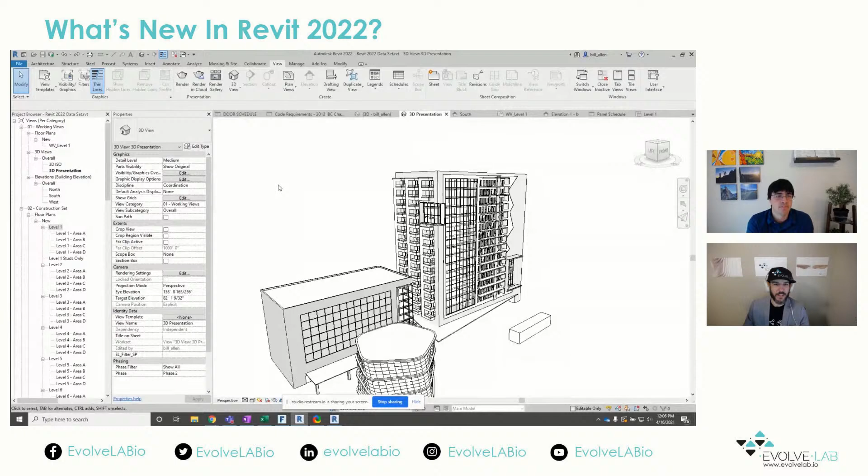I'm gonna start off with some of my favorites, and I'm curious if they're your favorites, Daniel. It's okay if not, but...

One of the cool new features they added in Revit 2022 is the ability to just show the stud layer. This has been a long-standing thing - the typical way architects document projects is to document and dimension to stud. That's really important, because when someone's installing framing on site, they're not measuring to the drywall, they're measuring and installing per where the stud's at. So a lot of architects dimension to face of stud, and you could dimension that, but you couldn't graphically show just the stud layer.

So now they've introduced this 'core layers only' option underneath the visibility graphics. If I hit that, it only shows the stud layers. And then of course you can go through and start to dimension to just the studs.

So I'm curious, from a 1 to 10, what does that do for you as a licensed architect? Oh man, a number rating, I don't know. I thought this one was pretty cool - maybe I'll put it at like a 7 or 8.

I worked on a lot of interior spaces, like a lot of office spaces, which have tons of partition plans. When you're getting shop drawings to the framing contractor, the framers, it was a little tedious to find the right line to dimension to. Caused a lot of mistakes because, like you said, you couldn't hide it. We actually made fake 2D drawings where we line-worked everything, or the other workaround was using the line work tool, which is very unreliable. Yeah, and it's very hard to know what people have done or to undo, to know what lines are overridden, etc.

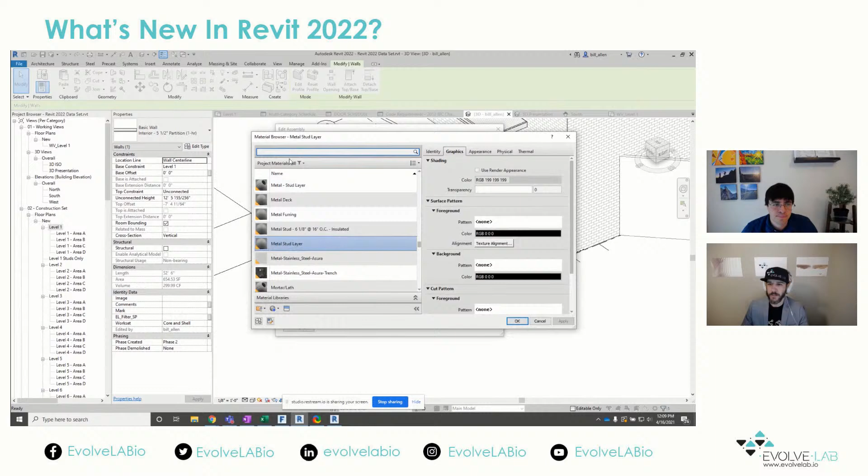First off, you have to go into the wall structure and change this layer to variable. So whatever layer you want to taper, that's the one you have to set. You have to first do that as variable. Let's use something more realistic, maybe like CMU or something like that.

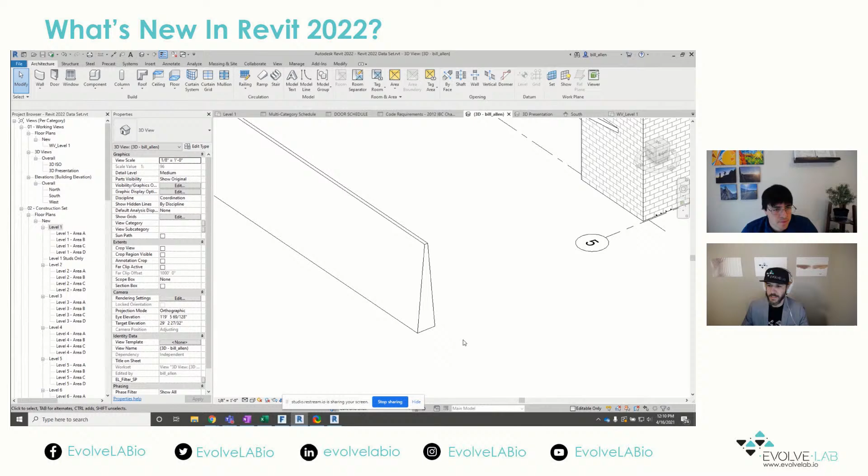So if we have this kind of layer in it and it's tapered, what you can do now in the properties is change the cross section from vertical to tapered, then override the type properties, and change the angle. So if I change this to say 5 degrees or whatever, you get this tapered effect with walls, which is pretty cool.

In the past, you've had to use the Revit conceptual massing environment, load it in, wall by face it - it's always been a challenge. Things would get disconnected. It also honors penetrations like doors or windows, which is pretty cool too.

They also have the ability where you can put in the angle in the properties, or you can actually drag these to a certain location if you want. So what are your thoughts on the tapered wall command?

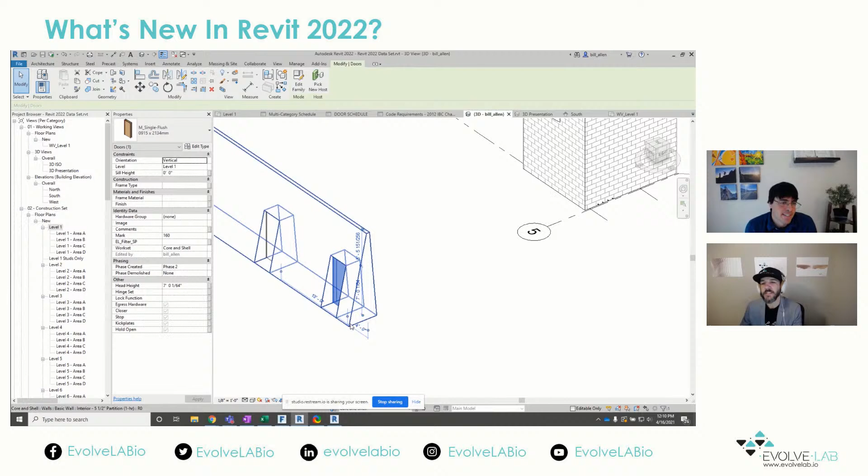It's kind of neat, yeah. I think it's not as impressive as the slope walls last year, which was really cool. And I think they've also added the sloped wall edit profile ability, is this true? Yeah, that's exactly it, because in most Revit projects, by the time you're done, almost all walls end up getting some sort of custom profile.

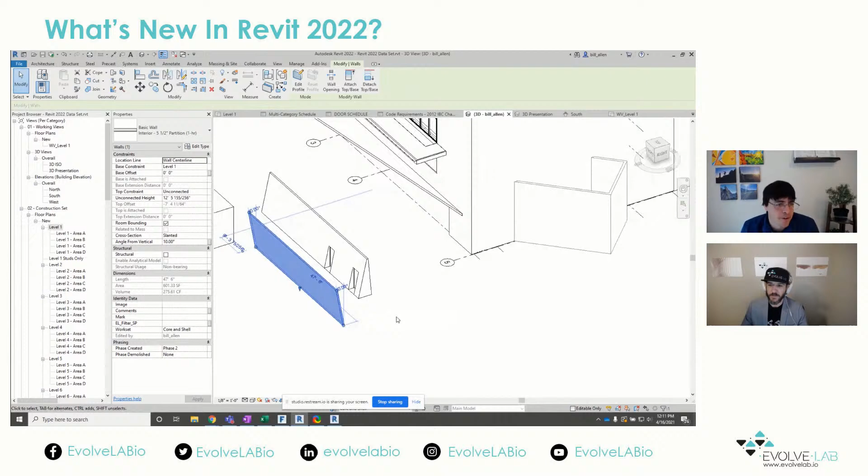Definitely. In general, I like that they seem to be trying to take the more common wall necessities and make them available using the native wall families instead of wall by mass. Wall by masses are really handy sometimes - you can do some complex forms, but it also kind of shuts you out of using a lot of other Revit functionality on those walls because they're a bit like a different entity.

Definitely, yeah, agreed. I can't say I can think of too many times I would have used tapered walls, but retaining walls, I'm sure it's out there. Definitely, yeah, the conceptual wall.

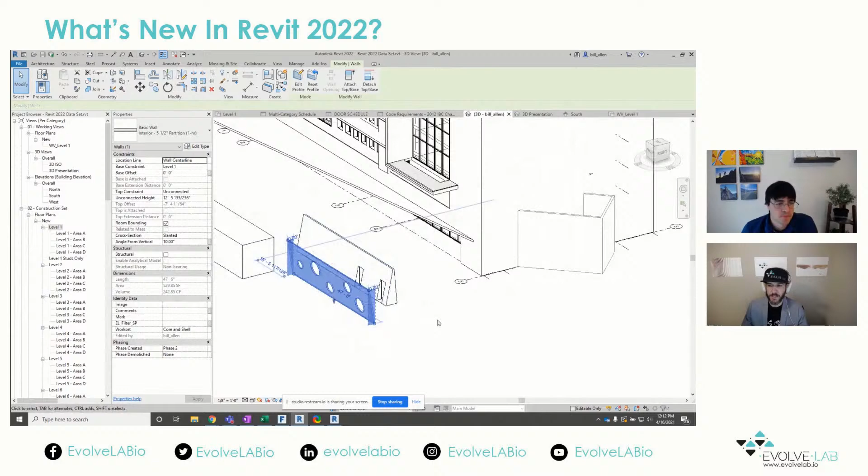Yeah, in the conceptual massing environment, I always called that Autodesk's best kept secret, because with the exception of Zach Kron and his blog post, I didn't see a lot of people knowing about that environment. But that was the way you had to do these kinds of geometries, and I think this is much better - having it as a system family, being able to edit it natively in the project, is much better.

Yeah, this is cool. The mass environment is really cool, but the modeling tools, kind of like the Revit family, are not so - maybe intuitive isn't the right word - but they're dissimilar from many other 3D modeling softwares, like the way you create a surface or a volume or a solid, how it kind of works. So you need a whole separate knowledge set to try to get what you want.

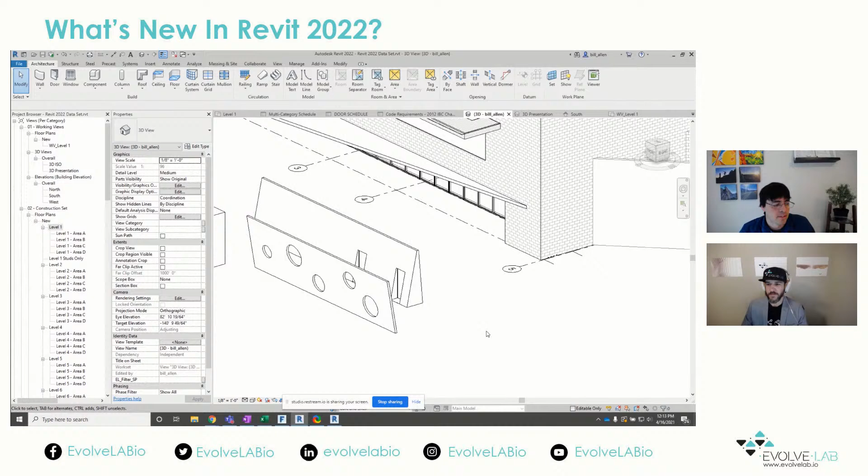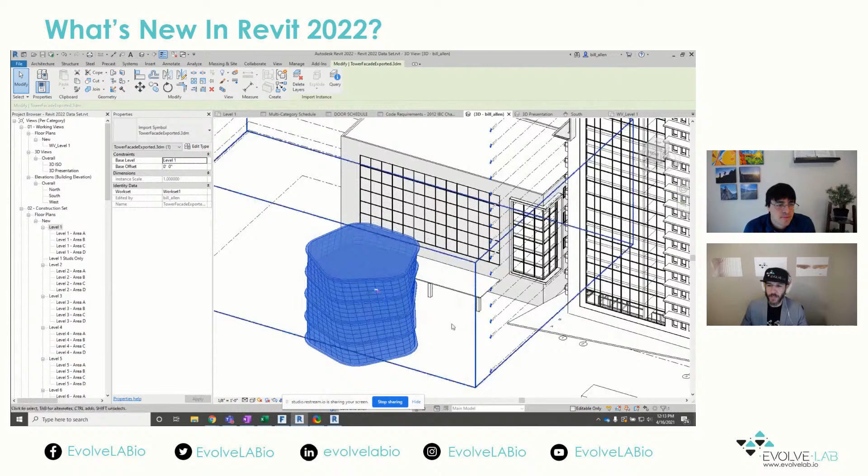What's really nice is I have this Rhino model that Chris shared with me - Chris on our team, one of our Grasshopper gurus, shout out to Chris. So any updates that we make on this, and you link it into your model, you can go through your typical manage links, click on your Rhino model, and then do a reload, which we didn't have before - you just had the import function. So that's really nice as well.

So I noticed they're doing a little bit more towards tipping the hat towards interoperability. It's not true interoperability yet, it's just the linking. But the FormIt integration actually was the one that I was pretty surprised about.

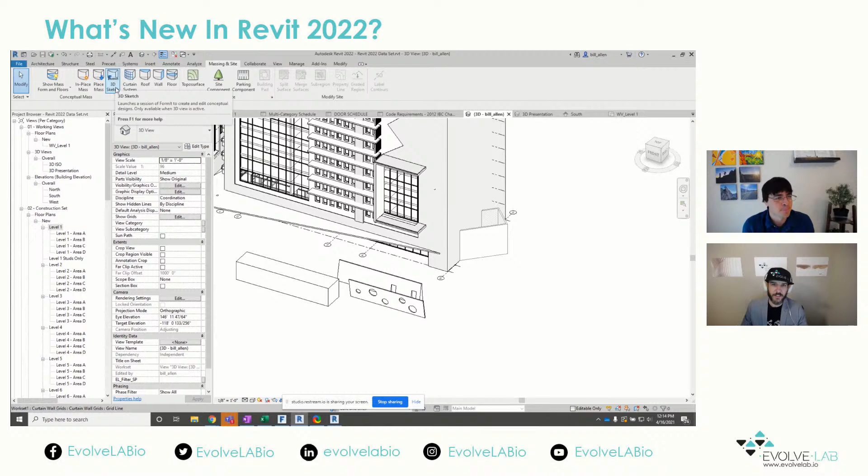What they did is they added this button in here, and it's this FormIt 3D sketch. You're pretty intimately familiar with FormIt, right? You helped out with some efforts on that, I heard. Yeah, disclaimer: we were working with the Autodesk FormIt team on some of their primers and tutorials and things, so I really got to explore FormIt and a lot of the cool tools that are in there.

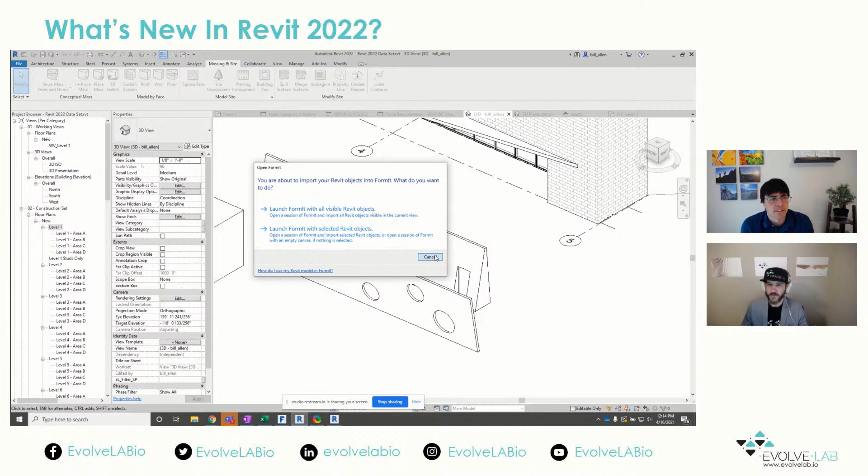A lot of people don't know about it because they've used SketchUp or Rhino or something else, but it's worth checking out. I can't remember exactly how the licensing works, but it might come with whatever Autodesk design package. Yeah, the industry collection, it comes as part of it.

So if I go through here, this one I was really surprised - I was like, okay, it's supposed to have some kind of FormIt, Revit integration. How does this work?

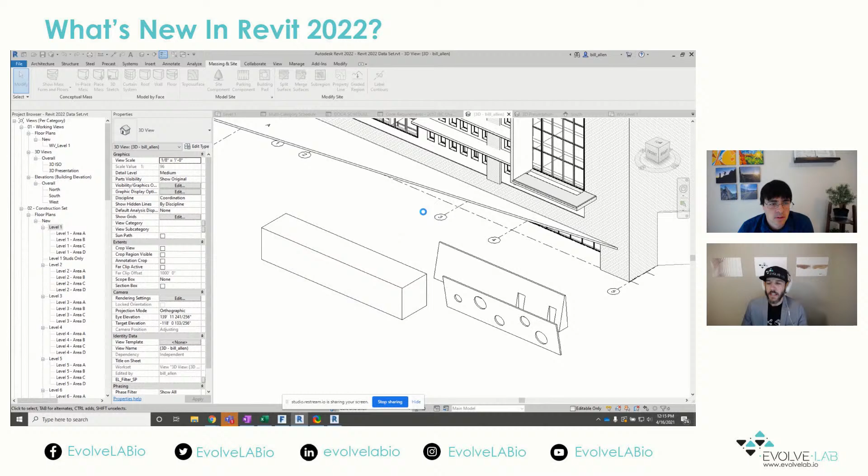If you go to the Massing and Site tab, there's a button called FormIt 3D Sketch. If you click on this, it'll launch FormIt. It takes a few seconds, especially if you have more geometry like I do here. What I was really surprised about is that it will contextualize your Revit model.

So it'll open up FormIt, but then contextually you'll have all of your other geometry. Of course, it's loading here. I have a version already open, so maybe I'll just jump to that. But in here, you can see it'll actually bring in all of the geometry within your Revit model.

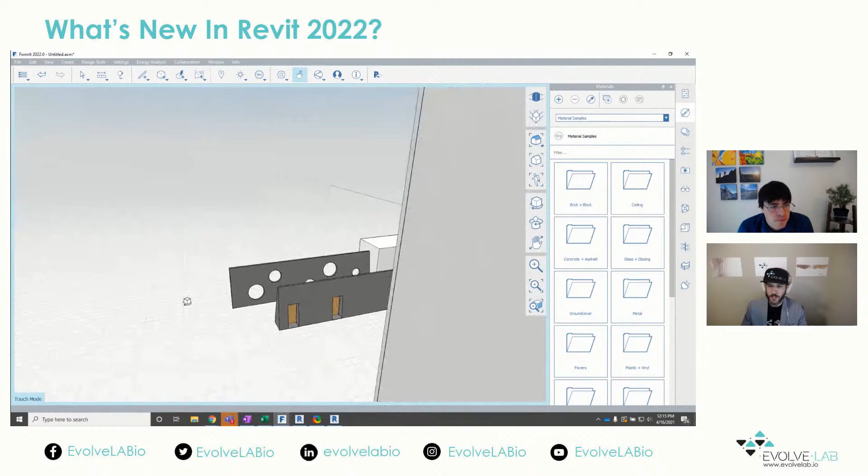There we go. So you can see even this tapered wall and this sloped wall that we just did with the profiles is showing up in real time in the FormIt sketch, which is really helpful if you're doing urban infilling and need contextual geometry to work with.

And you can go ahead and rough off that geometry too, use copy, and I think somehow the layers control what is Revit and what gets imported back into Revit, what FormIt things come back. But maybe they come in as meshes, I can't quite remember.

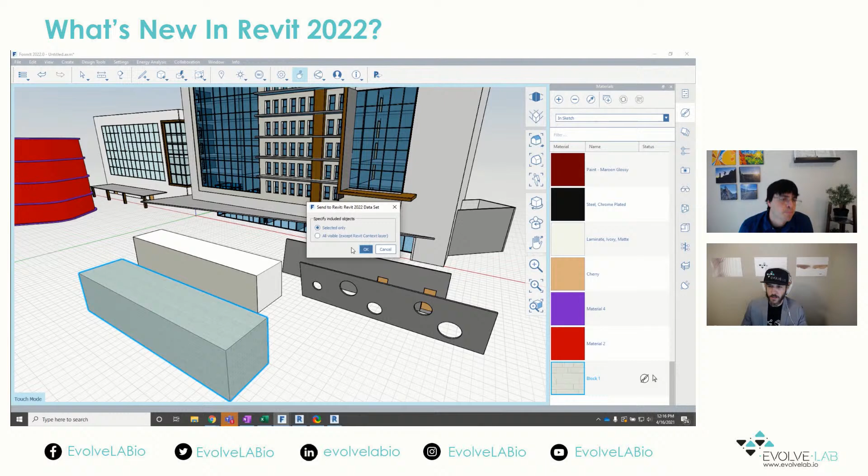So what they did is they introduced this 'send the selected model back to Revit' feature. I just have a box here, but before I do that, I wanted to show that if you go through it, you can paint different faces over here. If I click this color and put that on there, and then launch back to Revit, I specify included objects, all visible except the Revit context layer.

I think this is the one I want. And if I push this back, it'll actually push that geometry back over to Revit. So this new geometry is here. And if you change this to realistic mode, the materials actually go along for the ride as well. So you can see I painted that, and now it's over here in the Revit file. I was pleasantly surprised with that, I thought that was pretty cool.

That kind of integration, the contextual piece - what I understand is they're trying to let the user work in its respective platform. They're not trying to make Revit into FormIt, and they're not trying to make FormIt into Revit, but trying to let you use each tool, but better integrate them, as I understand it.

Yeah, I think that's the goal. I think it's pretty cool. You can use FormIt's more fluid, maybe more intuitive modeling tools, and they have some material editing tools and customization in there, and then it all will just come right back into Revit.

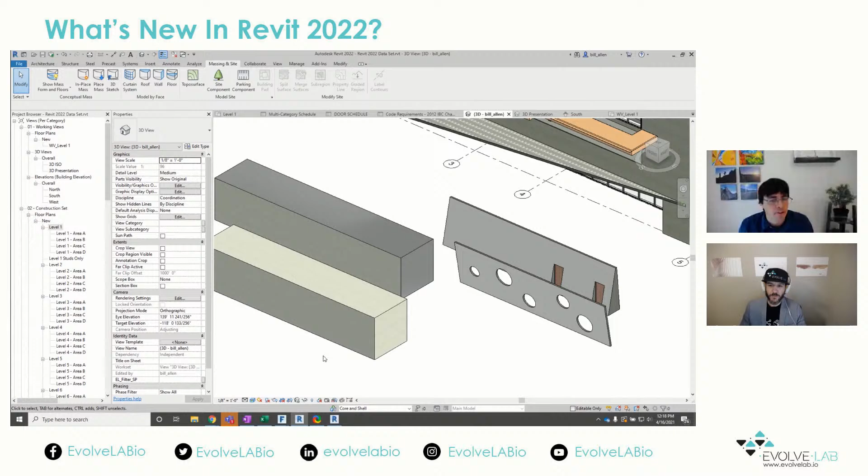What the Autodesk staff showed me is to use your section box in 3D and pick a section of your model where you want to do some design studies, then you can go into FormIt and just on different layers make different freeform shapes, whatever you want, pretty quickly, probably a lot quicker than you can do it in Revit. Then just import them back and maybe put them on design options or something.

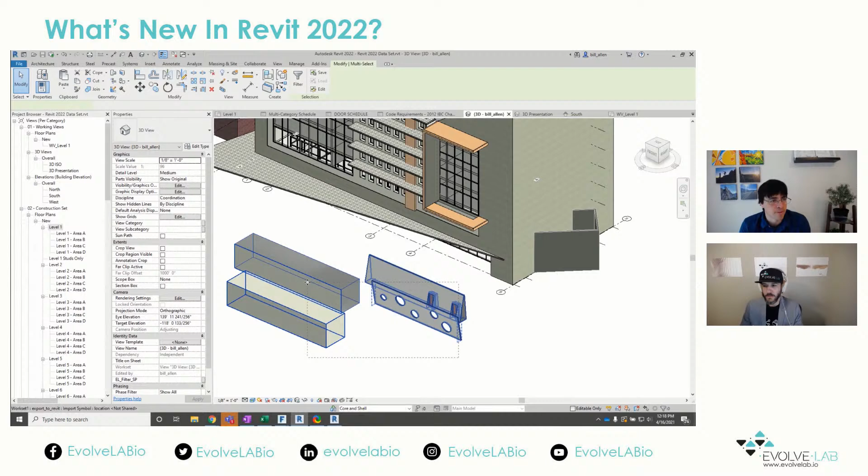That sounds like a really cool workflow. Maybe in a future live session, maybe you could show us how to do that. I think that sounds like a really cool workflow. But there's a lot of options there with FormIt, and you have the Rhino integration too.

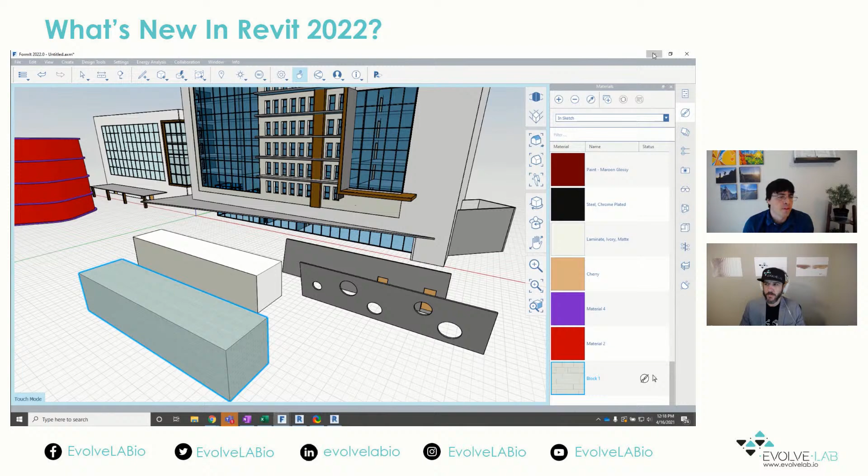Definitely. And I think the materials are separated too, and somehow you can control the visibility of the FormIt imported things, but also in the material library, it groups all the FormIt materials together too. Within the Revit environment or within FormIt? Within both, within Revit, yeah. Oh okay, cool, yeah, I haven't seen that yet.

You have to show us, maybe if we're going to do FormIt 2022, that one has lots of new features too. I like it. Get it on the calendar. I like it, all right, moving on.

Just because we have limited time here, I want to keep trying to get through these features. The other one I was pleasantly surprised by - I forgot to ask you, on a scale of 1 to 10, the FormIt Revit integration, what's your thoughts on that?

I'd probably call that a 6 or 7. One downside, it's great for the form modeling and stuff, but I think the one downside is the family. Everything in FormIt comes in as if you select one of those, a specific type family, or an imported AXM object.

Anyway, I think it'd be cool if it could develop even further, so you could have wall layers or window objects or stuff in FormIt that kind of come in and adapt to their respective properties. Maybe that's the next level. But I like that, it's a good suggestion. Maybe bring it back to the Autodesk team on that.

Sweet, yeah, all right, cool. Hard, but cool. Yeah, all right.

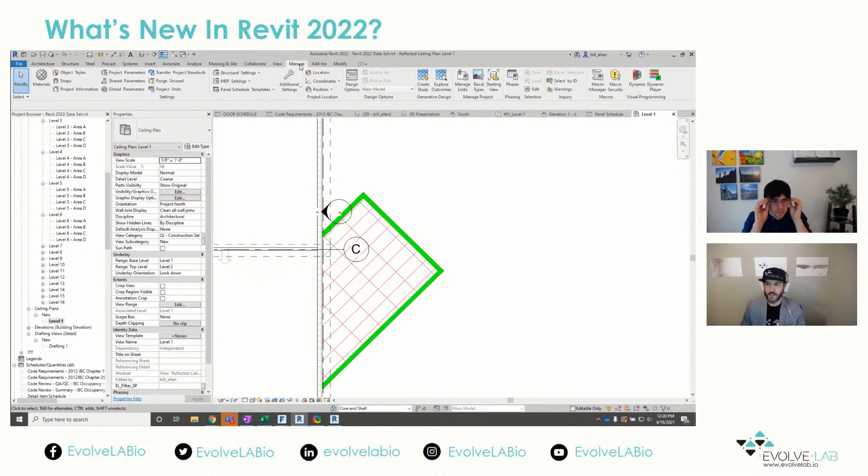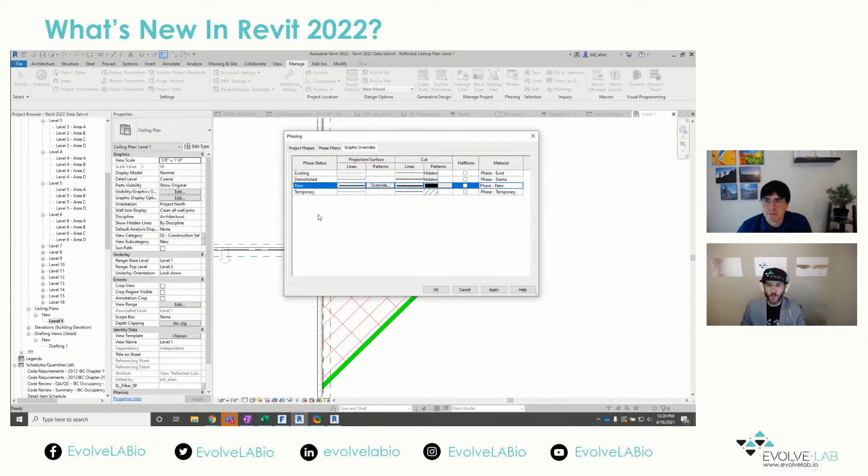So this other one that they introduced, phase filters. Now you've always had phase filters. When you go to your phases, you get project phases, phase filters, graphic overrides, etc. But you've always been limited on the graphic output of said phases, and specifically what elements get associated to that phase filter. As an example, I can't parse out walls exclusively, I can't parse out ceilings exclusively within this kind of phasing box here. But what they did is they introduced the ability to bring the phasing environment into Revit filters.

So I just set up a few of these to test it out. I created one for walls, and I created another one for ceilings. What's cool about this is that you can now not only modify based on the phase it's associated to, but the category of the objects within that phase. So I can start to go through and very surgically say, hey, I just want the walls, or I just want the ceilings. And further, I can also say which phase it's associated to. So it gives us a more surgical approach for applying phases within the phase filters.

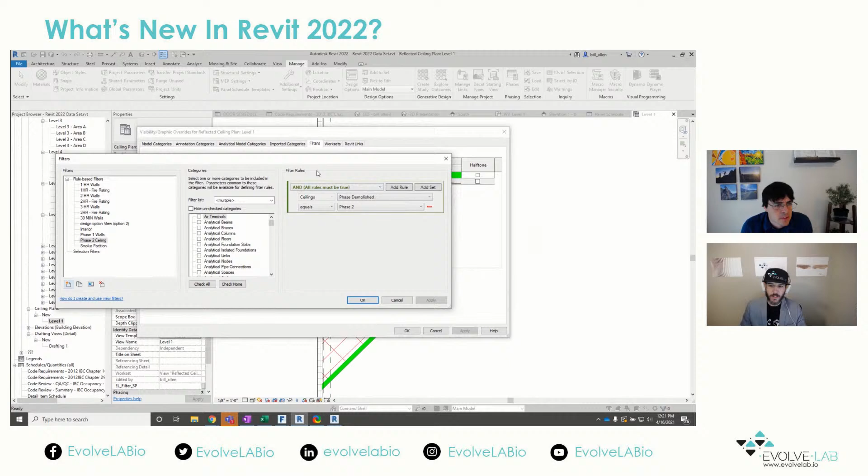I'm not sure, this seems pretty robust here. I'm curious to see what happens to that kind of phase dialog box. But this allows you to really meticulously edit those specifically based on phase and by category. That one I thought was pretty darn cool. I didn't know if you had thoughts or comments on that one.

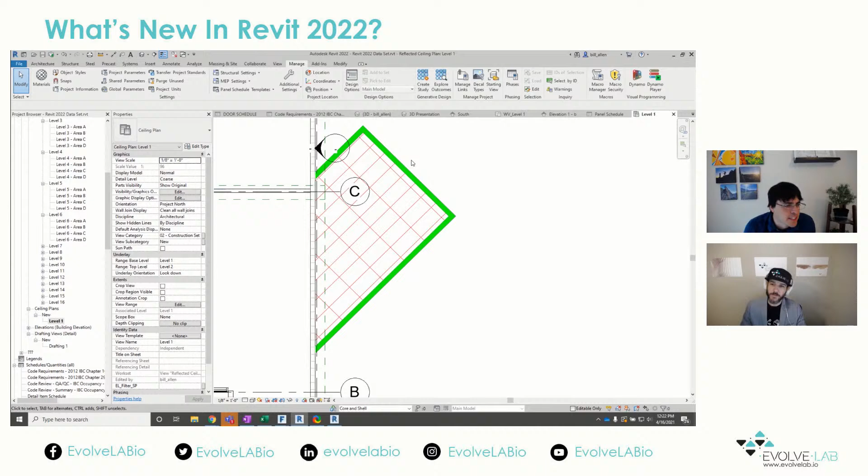Yeah, that's cool. So can you see objects from different phases filtered in the same view? Yeah, I think so, if I understand your question right. We have different objects assigned to different phases, like this one here is phase 1 for the walls, and phase 2 for the ceilings. And then you can associate the colors to them. If they exist at this, yeah, this is pretty neat, much more finite control over the phasing. Yeah, definitely, it's pretty cool. So that one's pretty neat.

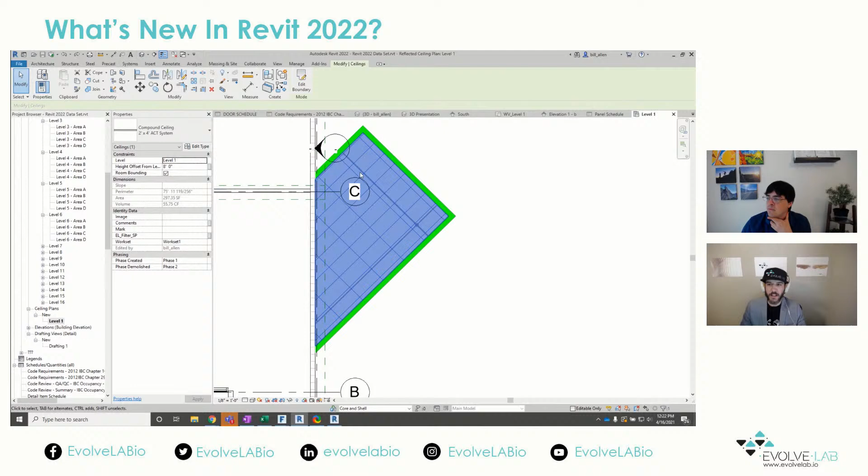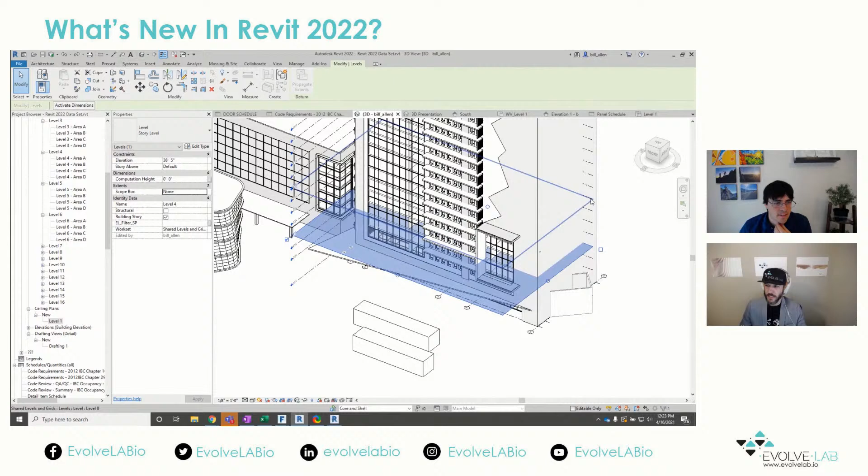All right, that is the phase filters. The other thing that they started to introduce, going back to our 3D view here, is the ability to add grids to 3D views. I think Navisworks has had this for quite some time. They introduced levels in 3D view, I think version 2020, 2019, somewhere around there. And so now they've introduced being able to have grids in 3D view.

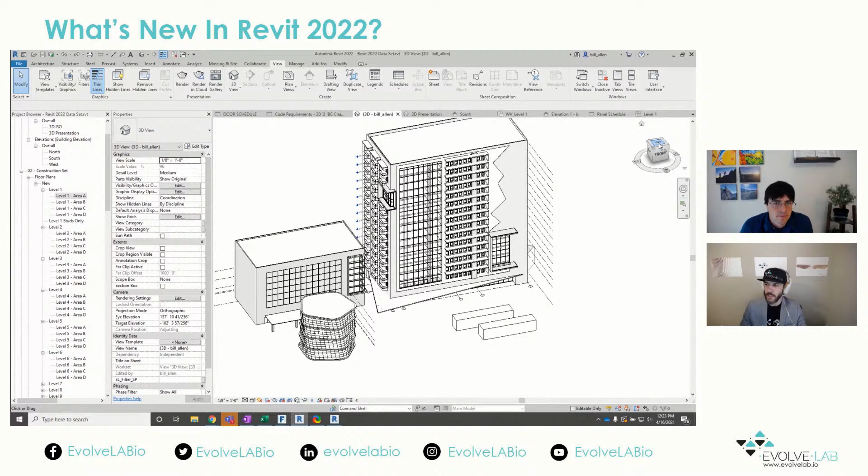And for me, I do a fair amount of modeling in 3D. I actually don't do a whole lot in floor plans. Even if I'm doing a floor plan, I'll typically do a top-down view, and I'm always trying to, because I just feel like I can get around the model quicker. And so being able to have those grids available in a 3D view, I found super helpful.

I'm going to rate this one probably like a 2 or 3 for me. It's helpful, not mind blowing, but helpful.

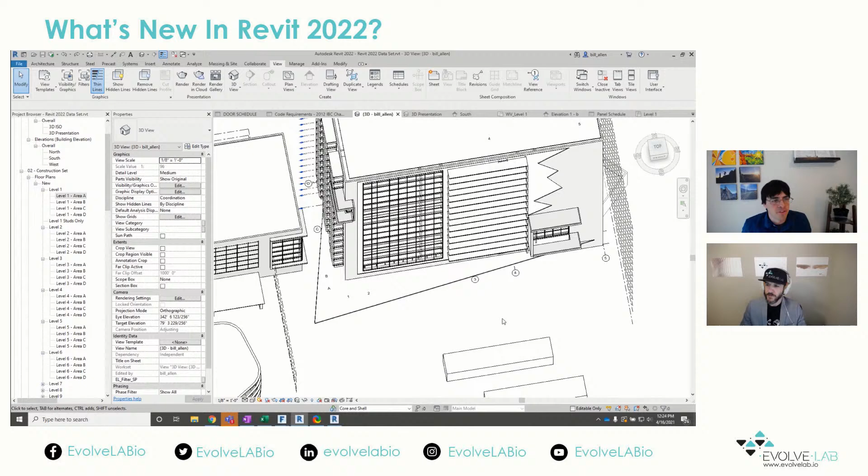I feel that, it's kind of the natural successor to the level thing. I find it handy, especially during project setup or maintenance, being able to manipulate the overall grids in 3D. Sometimes if you're trying to keep all your grids organized, you have to set up a view and make sure none of the grids have been switched to just the 2D extent in that view. It's hard to see if you have multiple buildings, then you get grids from one building overlapping another, just to manage them.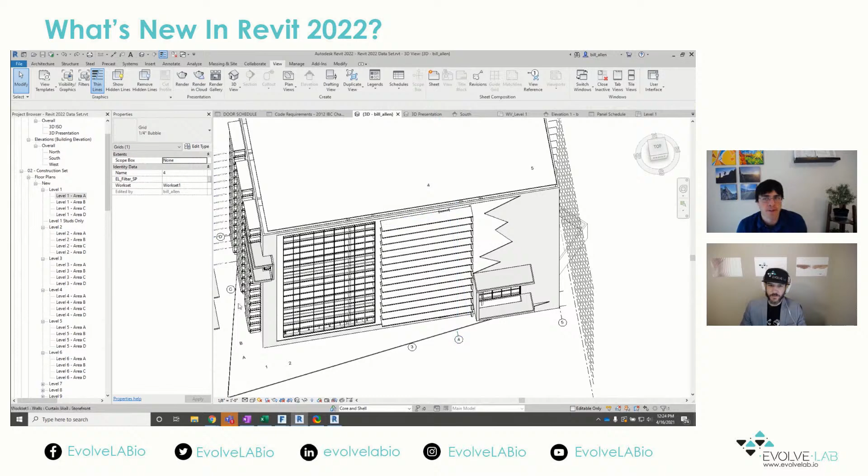It will be handy, and back to what you said earlier about the 3D view thing - I find a lot of people I worked with, especially newer Revit people, would end up working a lot in 2D views. I think what you mentioned is a great point, being able to work in 3D sometimes avoids errors and makes things more efficient.

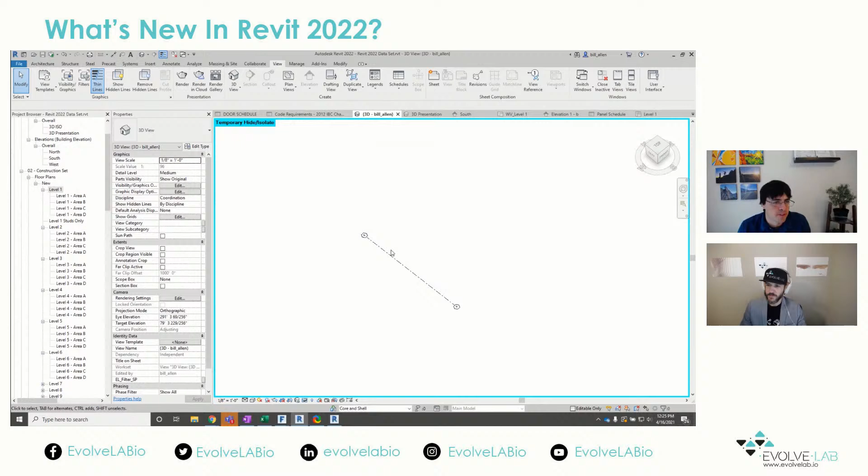To work between lots of different perspectives at the same time - maybe you select something in a 2D view and then drag it in a 3D view and edit the profile in a section or something all at once.

Definitely, and they have this function here. This isn't part of the new features, but this allows you to know whether or not you're changing 3D or 2D. That's always been there - that part's free, wasn't included as part of the presentation, but something to note.

Good comment, Daniel, on having multiple views, working in multiple views simultaneously. That's really good. Go ahead. Can you hear me okay?

Can you try to align them in 3D? We had a question in the chat - oh yeah, I don't know if that works. Align grids in 3D, really good question. Let's test it out.

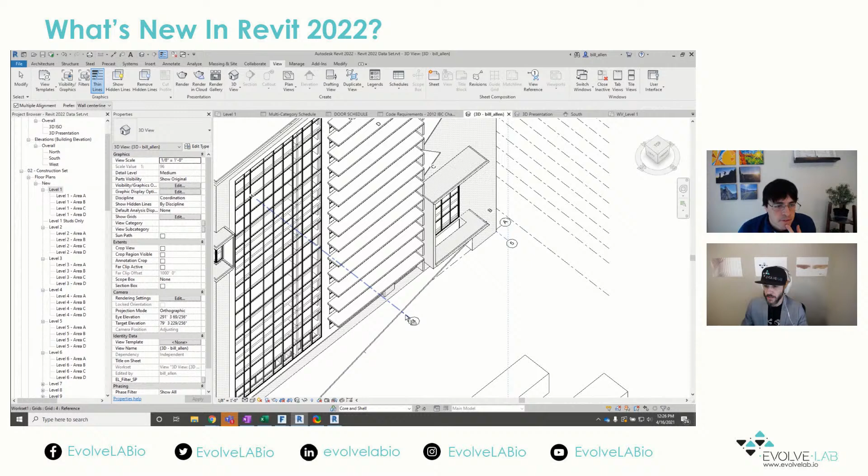So let's say if I have this guy, I don't see the little bubble on it to be able to even move it. I'm sure you could do align this way, right? Yeah, you could align those. That works, so you could align a wall to a grid.

Good comment and good question. And someone else mentioned - Dalton Webb - that's a good idea actually, the first feature you mentioned, turning on only showing the core layer of a wall.

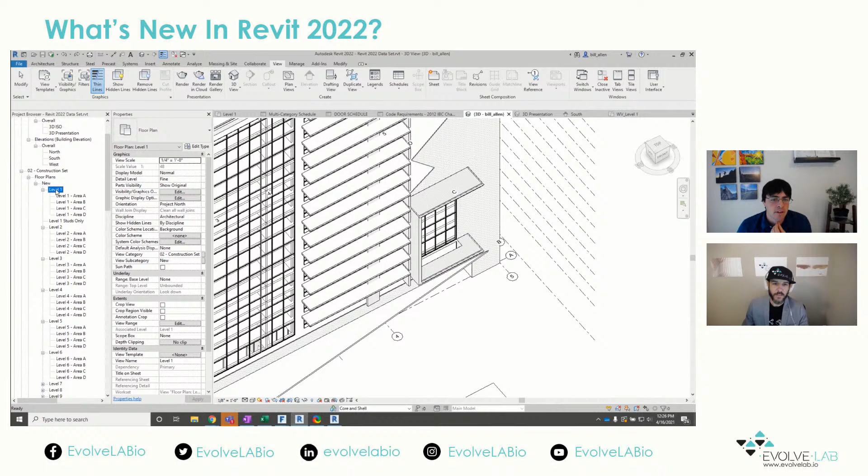What about it - to quickly dimension, which makes a lot of sense. You could just shut off all the finished layers, add all your dimensions, and then flip them back.

Even you could use the temporary view override thing, to do it in a click or two without messing up your view template. That's a good tip, really good tip, Dalton.

I like that. Again, instead of zooming in, pressing tab, trying to get to the right line, looking in the bottom left corner to make sure that's actually the core line face you want. Definitely, yeah, I like that.

Good comment - sometimes you've got to switch the detail level in a view so you can even see the wall layers, and then switch it back. Definitely, maybe that makes this feature even a little cooler.

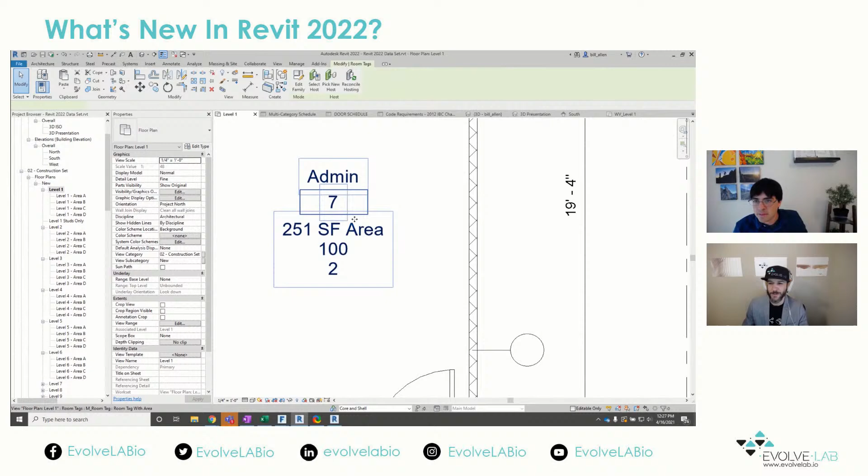Yep, agreed. Also shout out to Dalton and Jake, thanks guys for hanging out with us. This is cool - Jake's a good friend and former Evolve Lab team member, so hope you're doing good Jake. He's crushing it over there at Ball Aerospace, doing a bunch of cool LiDAR scanning. So shout out to Jake.

All right, cool. So moving on, let's go to the new model categories. Oh yeah, this is interesting. I have to say I'm torn a little bit because I've always felt limited on these categories, and I'm sure you'll agree Daniel - generic model and specialty equipment get abused the most. Everybody uses those as a catch-all. And I've always wanted to be able to create my own categories, but I know that's a double-edged sword because then users are just going to create categories that don't make sense, like box or furniture leg or something, too granular.

That's right, but they did add new categories, which is super helpful. So we now have audio visual devices, we also have fire protection - I think that one's long overdue, especially for those doing 3D coordination. Shout out to Paul on our team, he's doing a bunch of 3D coordination, so to be able to have fire protection available is great. The other new one is food service equipment.

The food equipment industry, like everything for restaurants and hospitals, having that category would be really huge for them. They also have hardscape medical equipment. I used to work at HDR doing primarily hospitals for about 10 years, so being able to have medical equipment as its own category is huge, as well as signage. We had a signage consulting group, so having your own signage category was good.

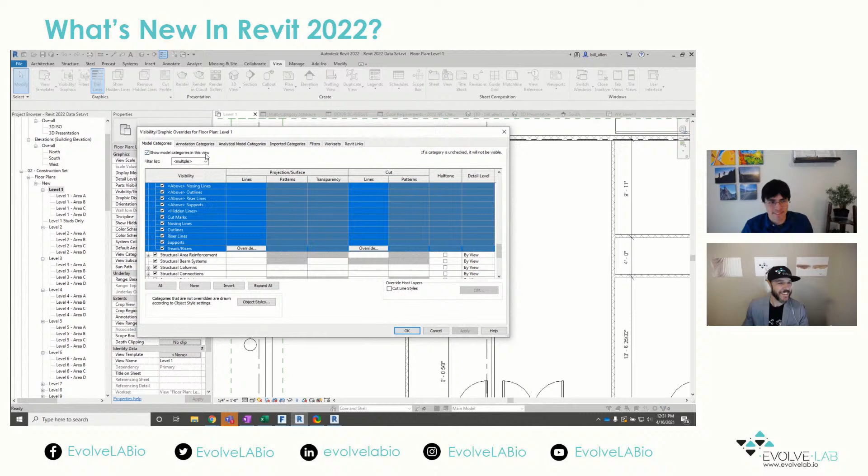I think some of these are nice, like you said. I think they'll help clean up the equipment and generic models, like having fire protection or AV equipment. Totally, it's still in one sense helping, but in another sense, without the sort of customized category ability you're talking about, it's kind of just creating more different boxes, but everything has to be in one of these boxes. Yeah, it's a little bit of trying to control the chaos.

Like, all right, we'll give you a little bit more, but it's the opposite of a less BIM-centric modeling program like Rhino or SketchUp, where you make layers and groups and sort everything yourself. But here they come with all these inherited properties, which are sometimes handy for quickly making building documents. So I guess it's pros and cons.

Dalton also had a comment, said it could be more useful when it comes to temporary walls, so you could filter out temporary walls in a building and only show permanent walls. That's a good comment. But then you have wall objects that are not of the wall category - I don't know how you'd do that unless you make a special family that's a temporary wall, built in with wall height and thickness and all the other things that walls inherently have.

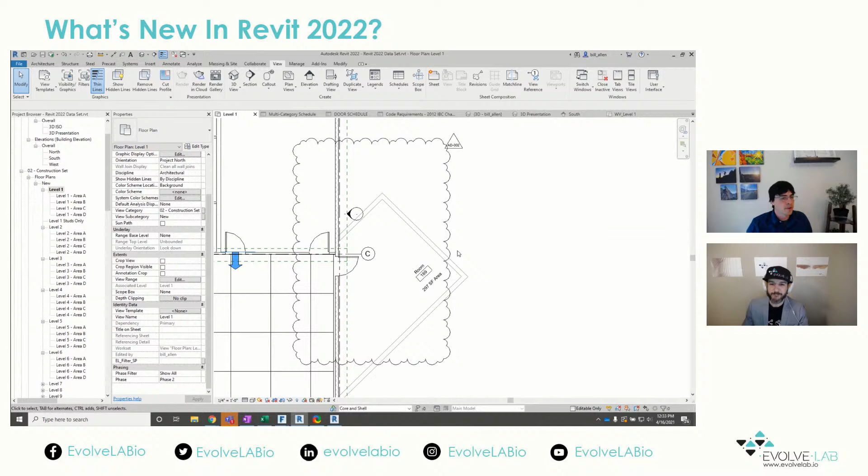Walls are a system family, whereas temporary structure might be something different - I think you'd use it more as an in-place family or some kind of component. Anyway, I heard it mentioned for filtering - it'll make it a little easier to filter by these new categories. In some models I've had, we couldn't hide generic models because like a third of our random objects are generic models, like that one door that we couldn't - it's a door, but we had to. Yep, good comment.

Moving on to the tags - this is pretty interesting and probably long overdue, in my opinion: the ability to rotate tags. In the past you could only change this from model, vertical, horizontal, but now they've introduced this angle option.

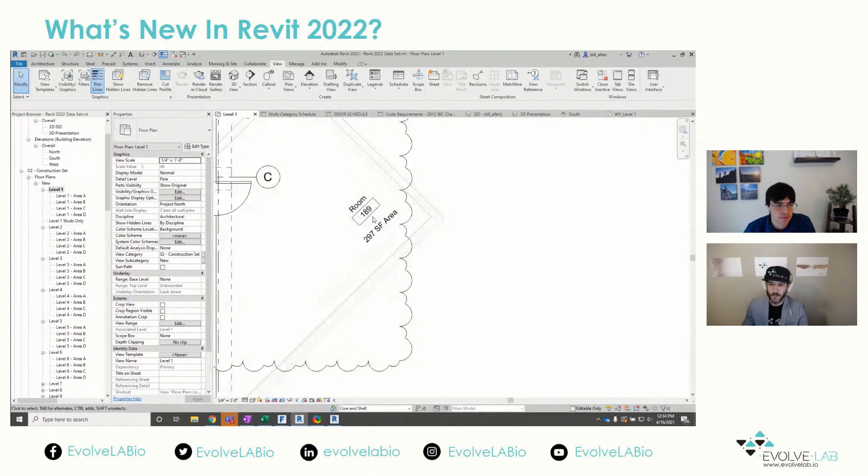So you can actually change the angle of multiple tags to accommodate whatever angle of the building is. I thought that was pretty nice for that piece of it, and long overdue. I can't tell you how many projects I worked on where the tags just didn't match up with the geometry, and you're stuck trying to do overlapping walls. So I thought that was pretty nice.

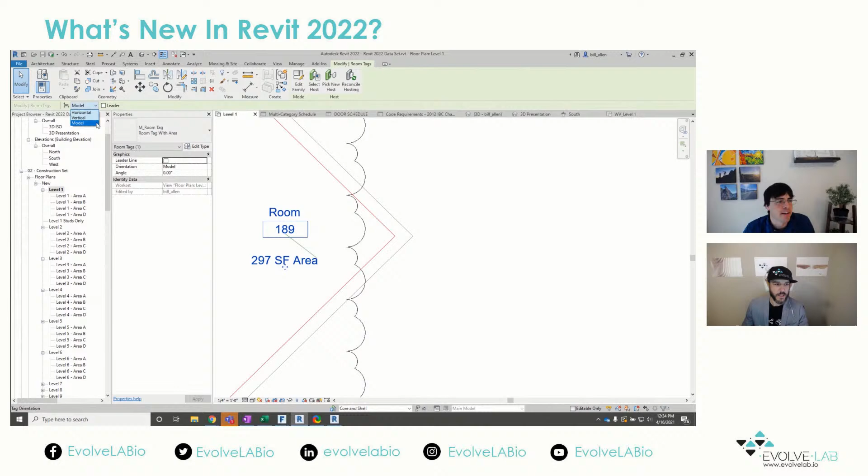That is pretty cool, I didn't know about that feature. I mean, they've had rotatable annotations for a while, which I use a lot. That's true, especially for buildings with some very slight angles in them, having to fit words in, rotating them like 5 degrees to get it to, I don't know, label curtain wall panels, etc.

Or mullions. Oh, you can finally tag mullions. Yeah, that's the new feature. You know, you could always tag panels, but you couldn't tag the mullions. So they introduced the ability to be able to tag mullions.

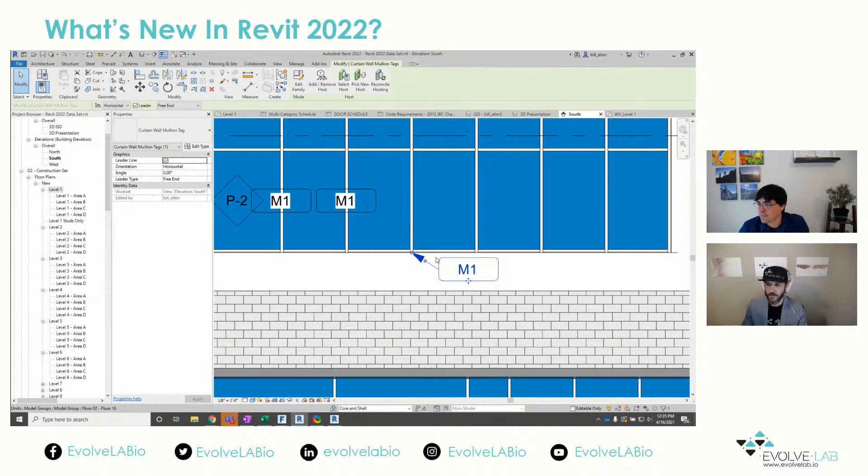And then probably, I may be biased, but this is probably my favorite new feature, the multi-tag feature. So you can actually click on your tag here, and then if I add a leader here, let's just say free end, and here you can actually add other host and tag it, and then further, this is so cool.

In here in your tag family, you can actually go through and add the count. So I added in here, under multi-leader tag, you can do host count, and you can add a host count. So I also did that. That's cool, I did not know that.

Yeah, I was pretty excited about this one. So the ability to tag multiple elements and have the leader point to it, I thought was really huge. Being able to count it was really huge.

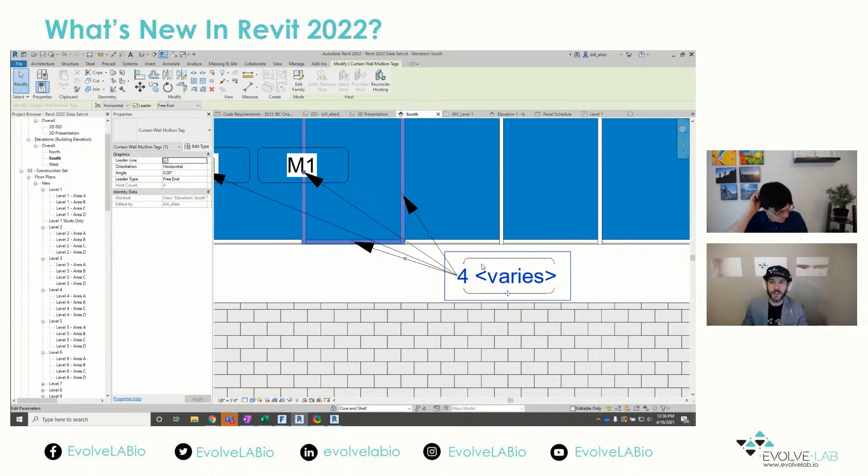And then the other thing they did is, what if you tag something that's not the same? It does this varies. And this was everyone's argument always for years, that if you add other elements to the tag, it's not BIMmy, it's not smart. This allows you to have your cake and eat it too. You're able to tag multiple elements, and then anytime you get outside of that, it gives you this varies warning. So I thought that was pretty nice.

Yeah, it seems so minor, but the varies one is huge, especially because not just in the tag, but in the actual, if you select multiple different types, it'll tell you which properties vary. That's right, and it does by default. I have an instance parameter of these.

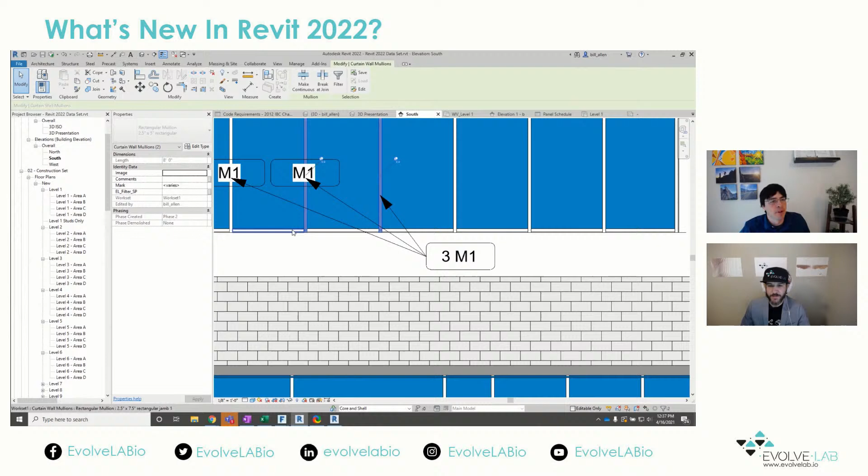Let's see if I make these different. So if I say my instance mark is something, let's say, and then this is 2. And then if I grab both of these, it now says varies, where before it used to be blank. Which was before, you would have no idea if all the things you've selected had the same property or not, or it just wasn't, it would be blank. So it could be not that, but it could be different, and then you could accidentally change a lot, which I saw all the time.

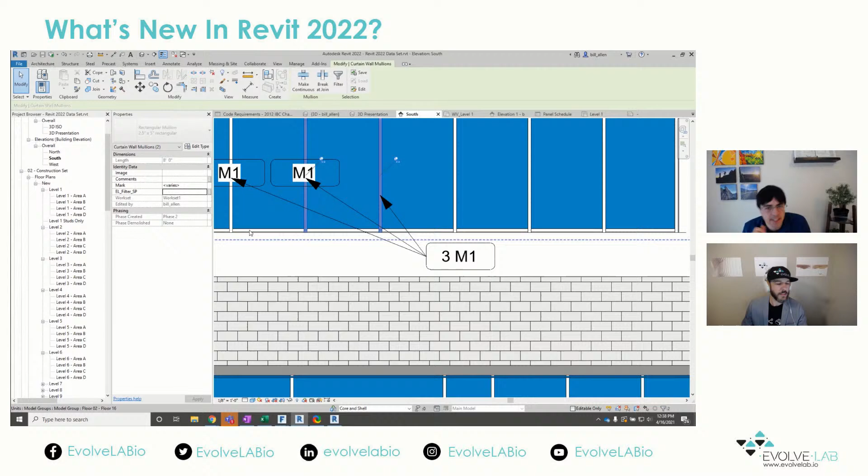I still see it all the time. Totally, because to your point, is it blank or is it just 2 different values? This now gives you the ability to know the difference. Did I see that? That's pretty cool. I feel like I read in a blog somewhere that you can adjust that varies text. You can, yeah, you can.

So let me see here, where are we at with our agenda? Let's go right there, let's go to schedules. So if I go now to a mullion schedule, and let's say that I grabbed that mark here, and we bring that over, I also have a type mark here. Let's see, M1s, a lot of M1s.

But if I go under formatting, you can tell it right here, formatting, and you can click on whichever parameter, and you can say display as varies. Or you can do this as well, so if you want to say, Daniel's a cool cat, you could also have that in there.

Let me make sure I'm editing the right one. So if these are different, and then these get rolled up, right? If I uncheck itemize every instance, Daniel's a cool cat will show up there.

So it's a cool little ability to modify and customize this to either show varies, your project settings, or whatever custom value you want. I am a cool cat. But is this right? Is cool cat supposed to be spelled with a K? I notice whenever it's slang, you're supposed to misspell it. I think for me at least it should be, since my last name is literally K. That's right, Daniel K. So that's appropriate. So yeah, that's how you can add the varies in there, or even your own value, which is pretty cool.

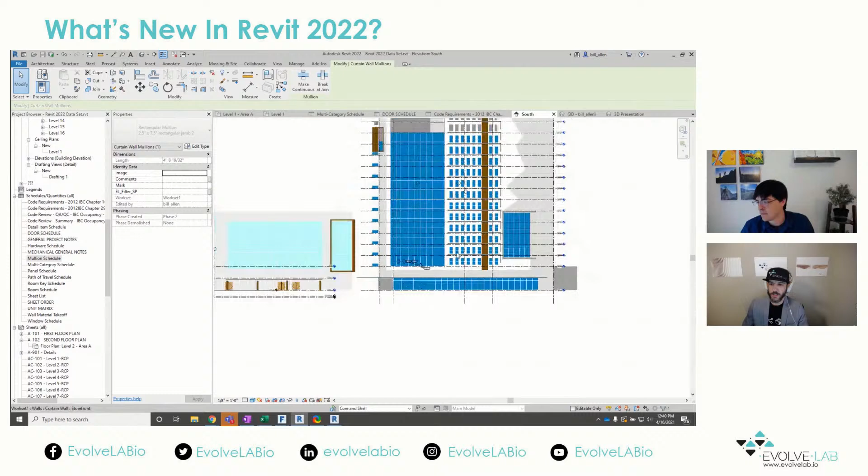Speaking of which, if we go back to our 3D view here, which I must have closed. Actually, I think it's my south elevation I want to show. So in here, we also now have the ability that if you have a linked model, so I have this linked Revit model here, and if I tag these panels in this linked model...

What would happen before is if you unlink this, your tags would get orphaned. Not removed, but if you unload, I believe you'd lose some of that tag information. Where now if you go through and you unload versus reload, and I say okay... need some Jeopardy music... there we go, there's the tag. So the tag comes back, which is really nice. It retains that, it permeates through the rest of the project and retains it, which is really good.

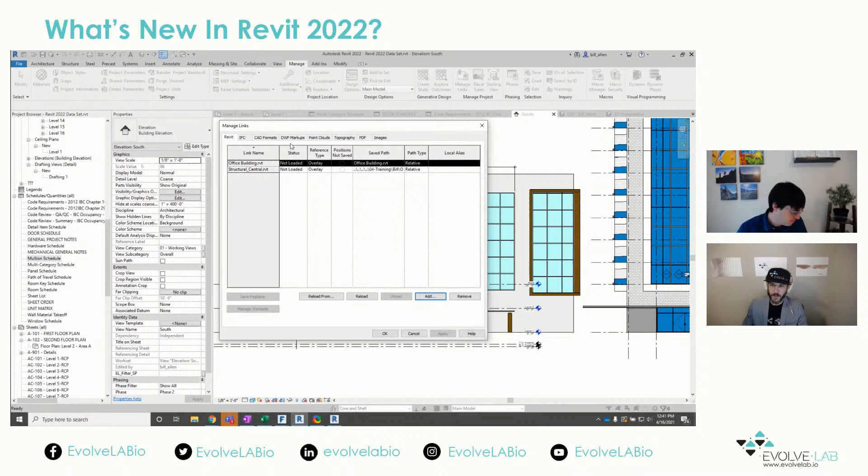Wow, does that work for dimensions too? That's a good question, I don't know, I didn't see it. You could try it. I didn't see it either, but I think that's a bigger one for me - having to unload or remove and re-add models, and it doesn't keep the dimensional references. Yep, so a bunch of views and sheets that you have set up get affected. Definitely, that's cool. I wonder how they do that. I guess they save the reference with the linked model. Yeah, they probably cache it some way, right? Yeah, like they save that information about that model inside your model.

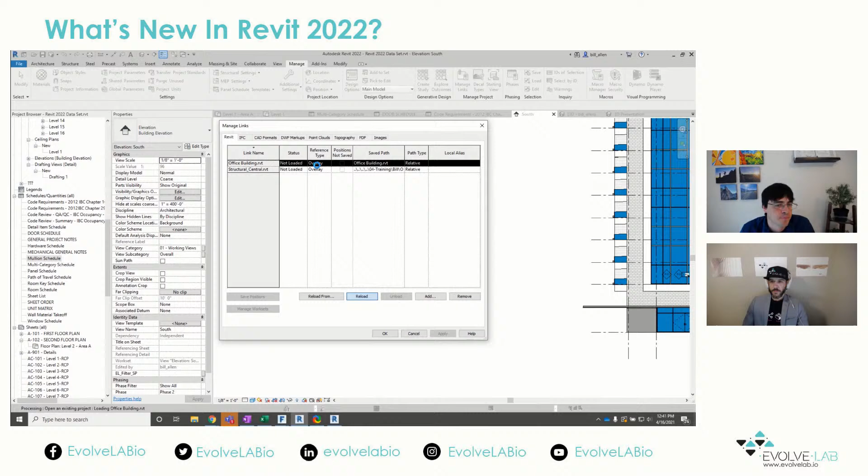All right, let's see, moment of truth. Did it save the dimensions? It does, look at that, Daniel. Yeah, so it might just save all the reference. Oh, that's kind of cool. Or at least dimensions and tags. Yeah, that is nice.

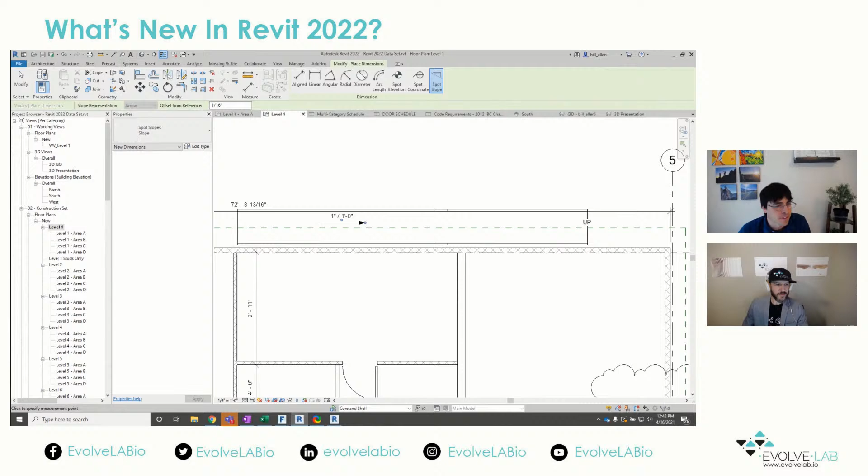One I'm less excited about and just feels like, gosh, you should have had this for a while, is the ability to tag sloped ramps. Oh my God, and not tag, but spot slope. So you can now put a spot slope on your ramp. You can do it on a floor, on a roof, but the one thing where the slope is probably most crucial, a ramp, you could not put a spot slope or spot elevation, I think. Yeah, I think you can do both now.

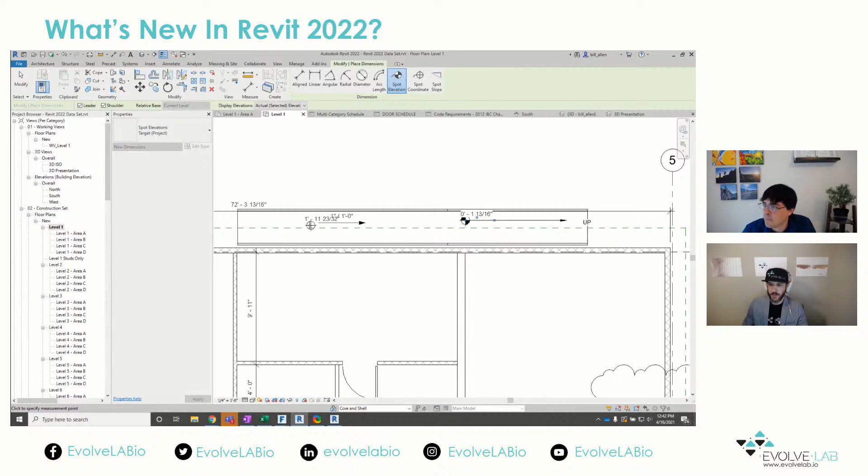Let's see, spot elevation, I don't know if I have one loaded. I do, there. So yeah, you can do that now, which is really nice. I remember a post on this funny Thanks Revit blog a long time ago that was complaining about not having this. That might have been like Revit 2016 or something. Definitely, yeah, it's nice that they have this now introduced.

Okay, this next part I'm probably most excited about, I'm curious to see your thoughts, is all the stuff they've done in the schedule. We touched on the varies piece, but I wanted to show other things - finally, they finally have this. So within your schedules, they've done a few things. They've actually done a ton of things in here. This is very, very exciting. The inner nerd in me is just jumping out of my skin.

So if you go to filter, for the longest time you could not filter by family and type. You can now filter by family and type. So that is huge, to be able to filter by family and type. Doesn't mean you have to show it, of course - people have always said, well, you don't want to maybe show what your family and type is in a schedule.

Well, you can make it hidden and then still filter by it. So that's what's really nice, you can filter now by family and type, which is huge. You can also filter by work set, and that's another big one.

So like in this example, on my project, I have these units. If I wanted to filter by work set equals units, I can do that, and it'll also filter by work set, which I thought was really nice. So I thought that was pretty good regarding some of the filtering features.

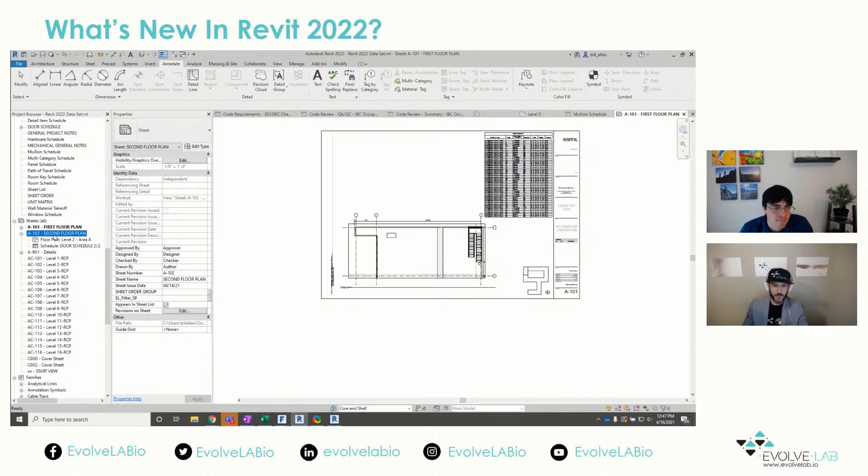So now you can split and place these. If I go split and place, it opens the sheet for you, and not only that - if I place this one, it actually will place the other one as well, in the same location. So this is one half of my schedule, I just did everything under 100. This first one is 7 through 52, and this other one is 53 through 99. It does that split and place on both, which I thought was really nice.

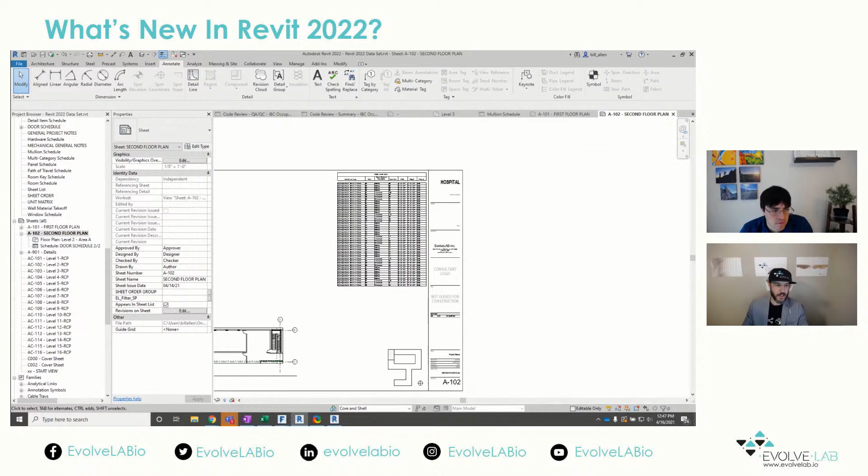Yeah, it's kind of cool that you could place them on like 30 sheets at once. But then again, once you place them, the placing isn't too precise, so if you want to move them, you'll have to adjust it on every sheet. That's true, there are some add-ins for that.

And then the other thing they introduced is this filter parameters. I thought this was pretty cool, they've overhauled a lot of the schedule. Now you could filter by parameter type, whether it's built-in, project, or shared parameter. You can do based on discipline. You can also do based on the value type, whether it's type versus instance. So if you have just a ton of parameters, it allows you to filter those a bit quicker, which is really nice.

Yeah, I think this is cool, but again, it's very useful, but also a little frustrating because under the hood, a BIM model is literally like a schedule.

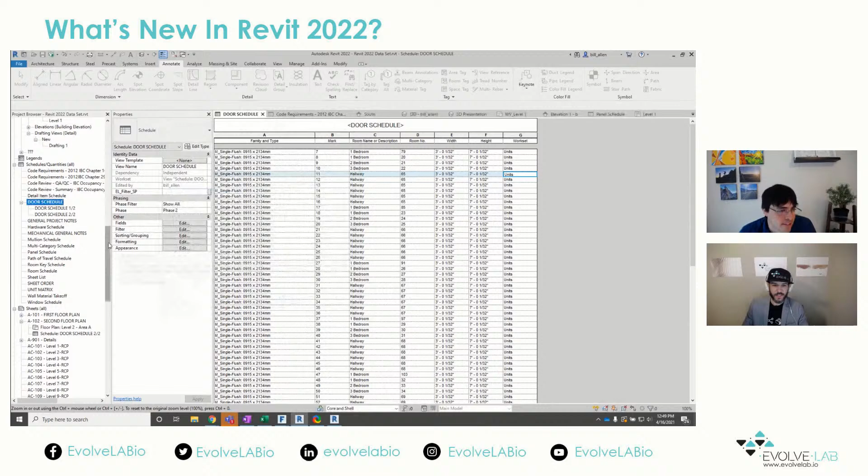It's a whole bunch of databases that are just visualized into a 3D model, but schedules are kind of the closest you get to seeing that. All these little filtering tools, would have been nice to have access to them. I think this could even be improved further. I agree, but it's going to save a lot of frustration, a lot of time too. So yep, since it's good.

The other thing they introduced was the ability to put shared parameters in a key schedule. So for any architects that have had key schedules and wanted the ability to use your key schedule to populate a tag, you could never do this. Now they have tag calculated value, but you could never take your occupancy load ratios and put that over into your tag from your key schedule. Now with the advent of being able to put a shared parameter into your key schedule, this was grayed out before, but now it's available.

This is huge, in my opinion, and extremely helpful. It's one of those things you should have had already, but it's finally here. That's the opposite of frustrating. It's a very unfrustrating one. Like, oh yes, it's finally there. It was very, very frustrating before. That's right, they figured out a way to do that.

All right, and then finally, to round off the schedules portion, the other thing that's the opposite of frustrating is you can finally export to a CSV file. So to your point, Daniel, it being a building information modeling tool, why in the world have we not had the ability to export to a CSV or some kind of data file? It's always been a .txt. So the ability to export to CSV is kind of a finally for me as well.

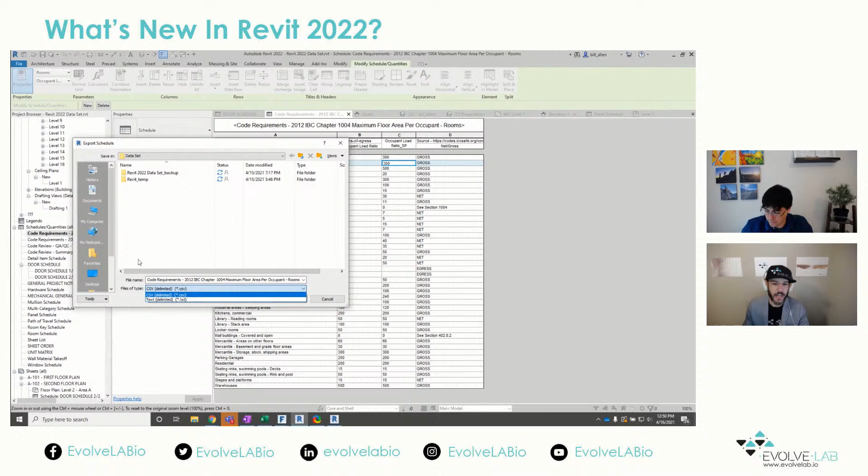Yeah, finally, I feel like in this Revit release, there's not one feature that I'm like, whoa, that's amazing. I think the tapered walls are pretty cool, but I'm not wowed that much because I don't see it being used by me that much.

But just interoperability. What? No, go ahead. I was going to say interoperability, that thing in general. Like being able to do the CSV, also the format integration that they totally overhauled, the Rhino links. We didn't talk about the PDF exporting and integration, but that's pretty cool too. You're stealing my thunder. Oh sorry. No, I'm just kidding, I don't care. I think that's all right.

And you talked before about the data drop chasm, the data chasm between different programs, the model drop chasm between different softwares. And so having the ability to jump over that chasm is huge.

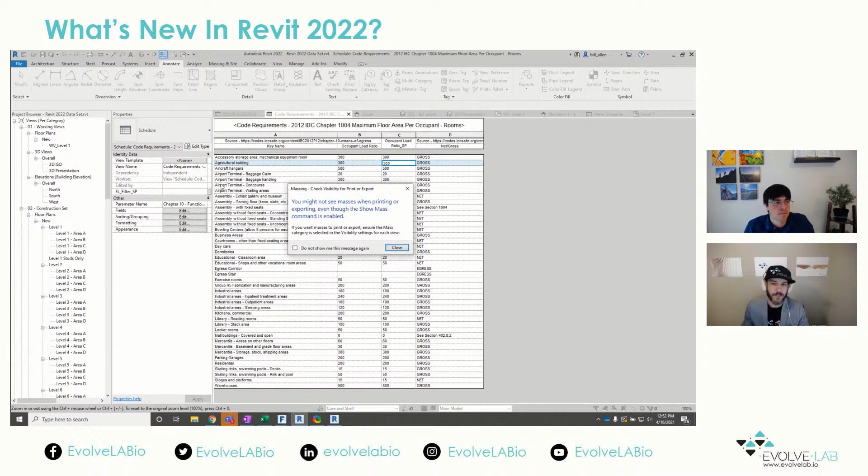To your point, yes, we do have the export to PDF function now. This one, I felt like a lot of people in the industry were saying this is the greatest thing ever. I was always like, I don't know, you still had the ability to do it. Granted, you have to have a print driver. So I haven't still seen the huge value of this one. Yeah, it's native, it's integrated, you don't have to have a print driver, but you could kind of circumvent it the other way. Unless there's probably some things you can export out of Revit that you can't print to PDF. That's the only huge one I would see on that side.

If that one doesn't excite you, maybe the ability for code analysis will. They've started to introduce a few more functionalities here in this route analysis. For anybody using Revit for a long time, we've had to always do a travel distance line-based family. They introduced a few years ago the path of travel, which was really nice, and the reveal obstacles, but now they have this multiple path indicator. They also have these people, so if you want to socially distance your people and make sure there's not going to be an issue with that. I thought this was pretty cool from a kind of data-driven solution.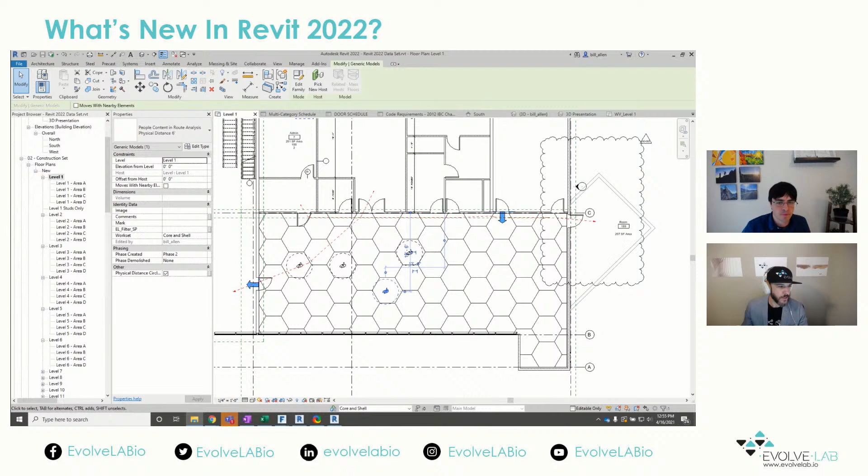I was going to give you a quick shout on that. Let's just show real quick - this isn't Revit 2022, but you did build out a cool little simulator that did a simulation for it, which was really nice. This guy, let's see, here. Oh yeah, this guy. Yeah, it was a quick little study for looking at exhibit halls, and could you traverse them without running into people, and if people honored the 6-foot distance rule or not.

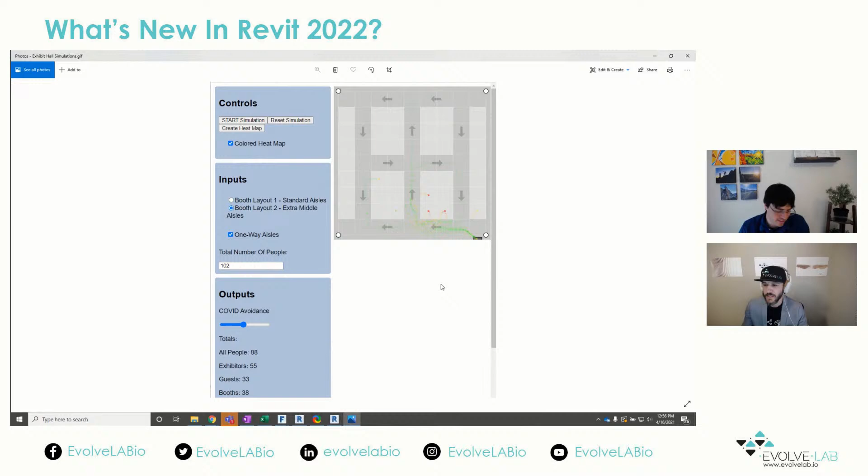If they did - yeah, this was an interesting little study, especially because a lot of our occupancy loads and densities and things were kind of thrown off, because they weren't designed for pandemic safety. Most of them are designed based on fire safety, right? Right, evacuation times. That's right.

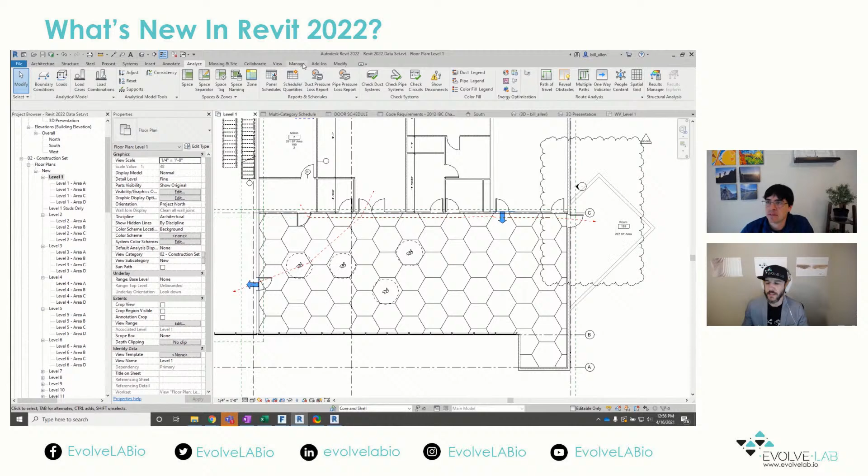All right, the last thing I want to show before we get to your part, Daniel, because we are running out of time and I want to give you enough time, is the sheet issues revisions. They now give you the ability to have your own custom numbering sequence. So in here, you could start to have your addendums grouped or your CPRs grouped, and then associate a prefix with this, minimum number of digits, starting number, etc.

So in this one, I did 3 digits starting at 1, so you can see it starts to go through that. They've introduced that now, so you can have a little bit more customizability around your revisions, which is nice.

It's a nice to have, in my opinion, but not mind-blowing, which I think we should now share your part, which is mind-blowing, in my opinion. Yours is, I think so.

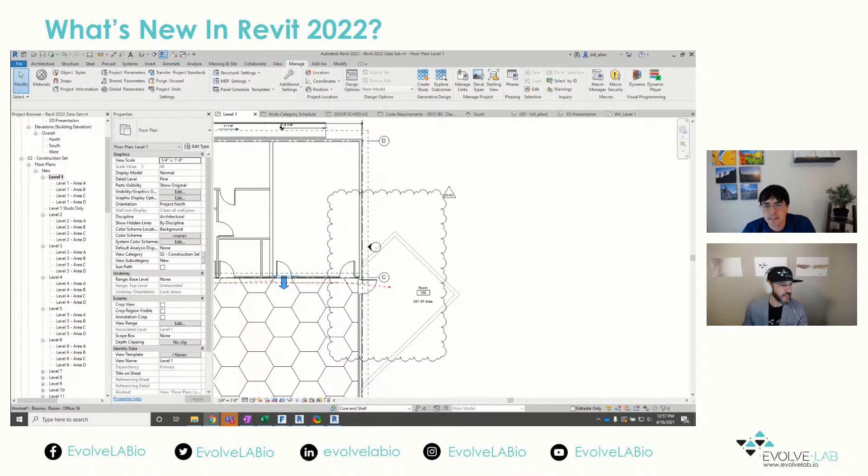I'll stop sharing mine, try. See the building? The thing you were just talking about, the renumbering, I think that's really handy to have. It reminds me of our renumbering add-in.

But again, it's designed very specifically for revisions. In Revit, there's sheets, there's views, there's view titles, detail numbers, wall types - there's so many different things that could use maybe a better renumbering system. Agreed, totally agree, good start.

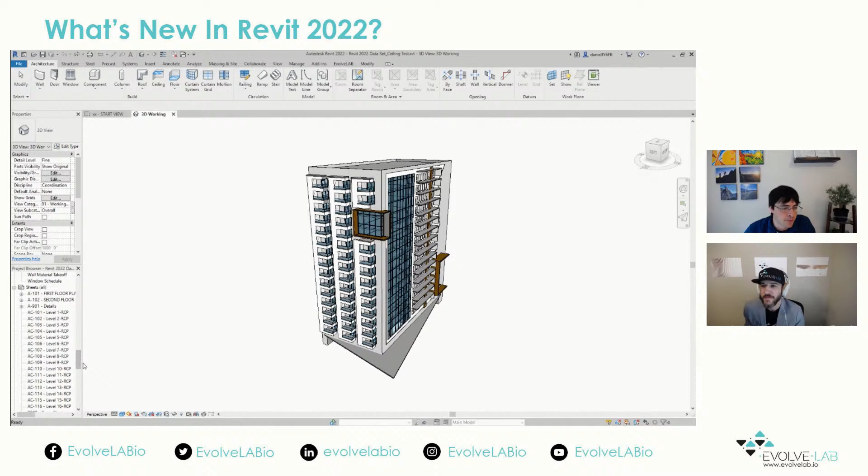So I got to play around with the new API basically just for a day, and the coolest things for me that you get are access to things you couldn't previously control through the API. The API is like, if you're writing code, there are bits of Revit that you're allowed to change or modify. And the one we have here, the biggest request for a long time has been ceilings.

Revit has not allowed you to programmatically create ceilings. Yeah, and now they do. Also in Dynamo, you could do this with Python. Now in 2022, there's some make Dynamo nodes that'll do this too. The one we did, just to kind of celebrate this, is a ceiling from room tool.

Essentially, it pulls up a list of all rooms in the model. Actually, I think just enclosed rooms, because you can't make a ceiling for an unenclosed room. And then you can select them all. I got a little filter, so if you just want the 1 bedrooms, I just type 1. Maybe I'll do them all since we're here. Level, I think the left number is the room number, which on this model, they're not really sorted by floor, but in case they were, that could be handy. Yeah, you can see they don't really.

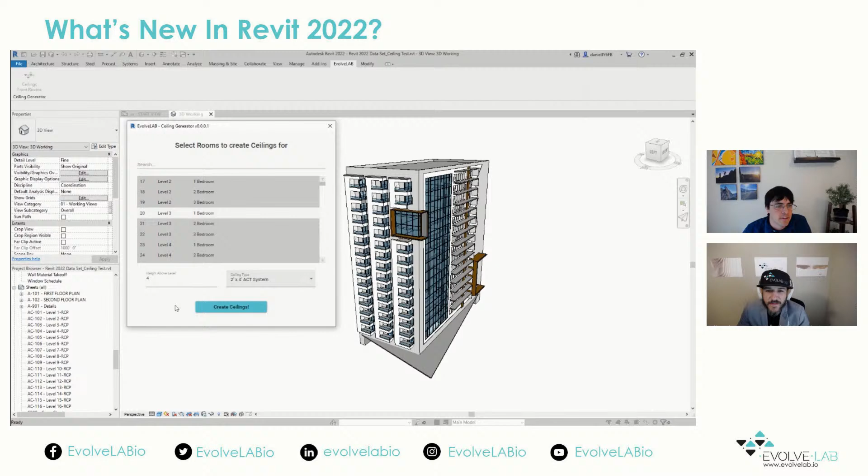Anyway, you can select them, select your ceiling height. I'm going to make it 4 feet so it's something we can see. Select the ceiling type from what's in the model. This doesn't have many, kind of like a sample model. Maybe all of them, not this one. All of them except that one. This is probably a lot of rooms, so it might take a minute.

If you ever have to create a whole bunch of ceilings, 162 ceilings. Dude, that is incredible. They're in there. They're 4 feet above the ground, that's why they're intersecting the doors. You did this just for demo purposes so we could see the ceilings, but it just created, if you wanted to put them at 8 feet or 10 feet, it just created 162 ceilings in about 3 seconds.

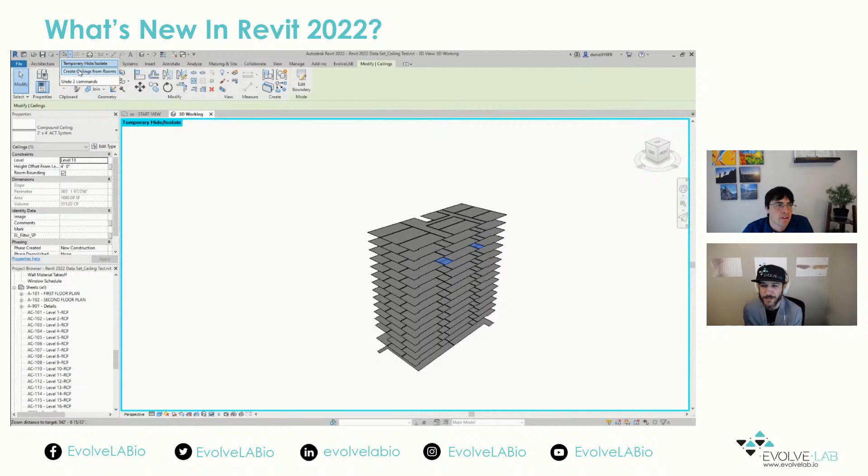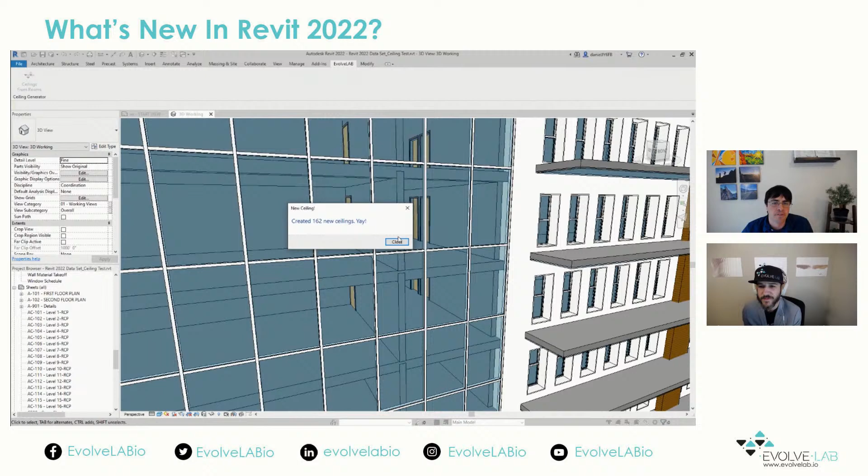Yeah, we could do it again at 8 feet. Sounds better, 8.5. And I think if I don't pick a type, it just goes with the generic type. Actually, it doesn't take that long, because think about it, in Revit, I'm sure you've had to edit sketch and save sketch, and usually just that operation can take some time, especially since some of these, like this one.

Can I select just one? No? Should be able to. Yeah, there you go. This is like, it's not that complicated, but it's 8 or 9 lines. Yeah, but it would take you more than 3 seconds to sketch that out. Even with the pick tool, to pick all those rooms, that was so much quicker.

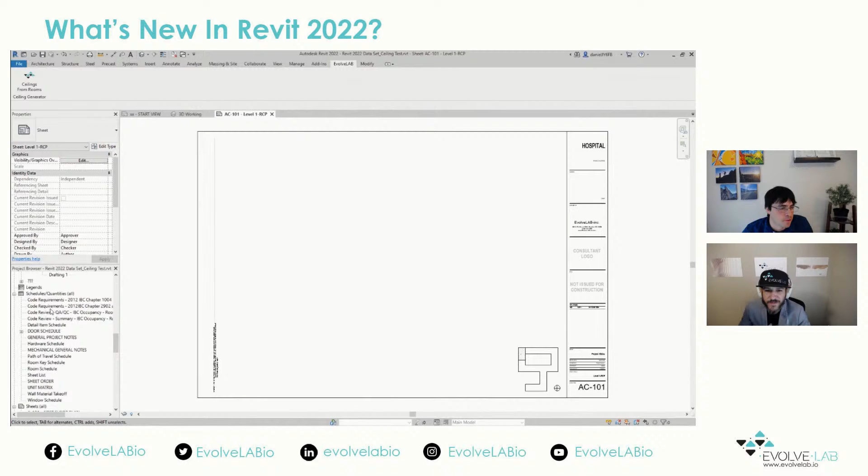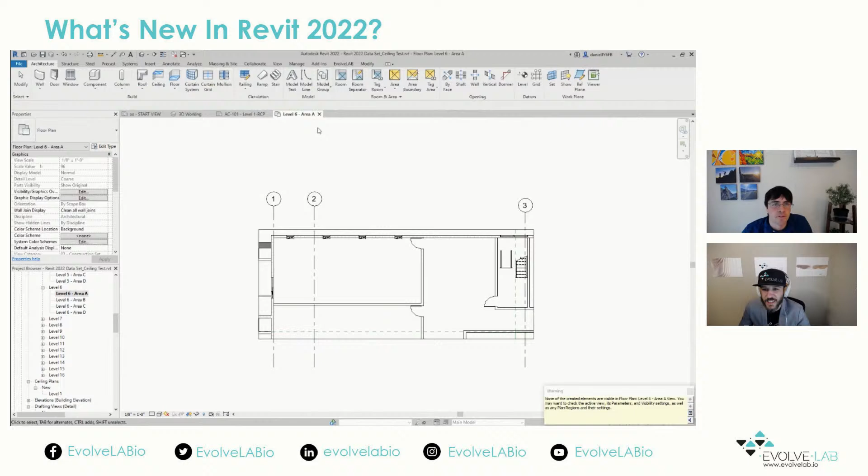And again, Revit also has these plans set up. Oh, those are sheets. If I go to a floor plan, Revit already has a tool to make ceilings with 1 click, I think. Yep. Oops, that's a roof. Ceiling, automatic ceiling. Yeah, but it's 1 room at a time. Not visible, and you have to select, I guess I have to make rooms visible. But it is 1 at a time. So now we can sort of do that.

Another thing I want to add is like an offset. So if you wanted your ceiling to be like 1/2 inch from the wall, because the wall goes past, whatever ceiling it is, grid system. Anyway, that's that. I think, anything else I should share with this?

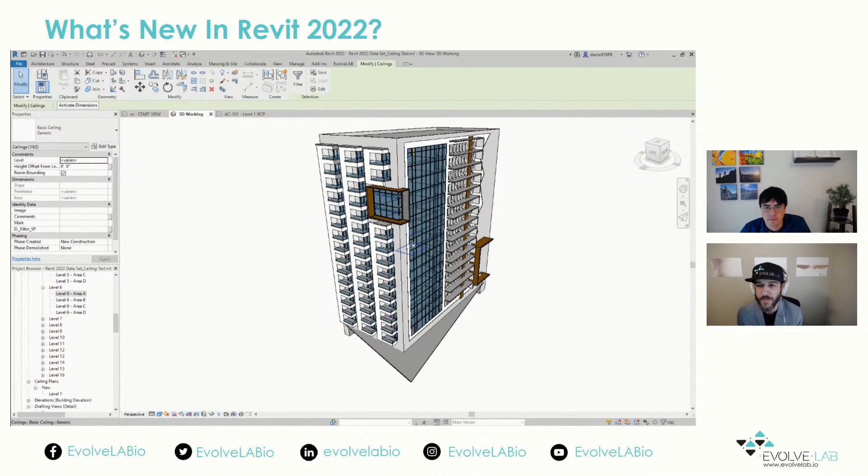Ceilings. Love it. Cool. Okay. All right, that's all I got with that.